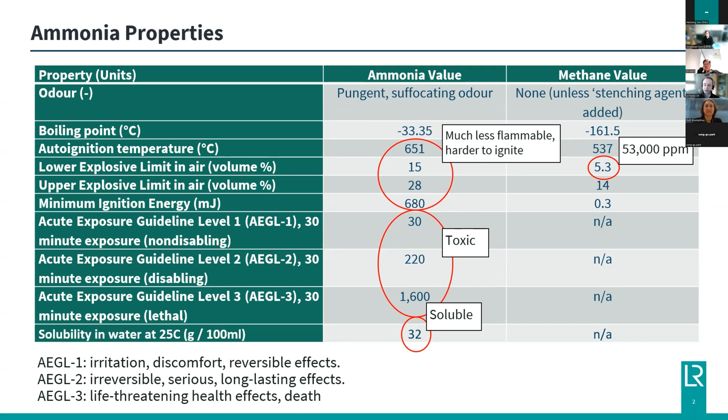We can learn a lot from what we already know about designing ships with fuels like LNG, in terms of engineering practices to design safer ships. But we need to remember ammonia is not the same as LNG - it has other properties, and the toxicity particularly means the designs we create will not always be exactly the same as for an LNG fueled ship.

Thankfully, class societies like LR and others are starting to produce rules and guidelines for the design of such vessels.

It's also important that we understand the behavior of the fuel, particularly the difference between refrigerated ammonia and pressurized ammonia. And of course, semi-refrigerated ammonia sits somewhere in between.

When we have a spill of refrigerated ammonia at its minus 33 centigrade boiling point, depending on the hole size and pressure, generally what we see is an initial release with a low fraction of vapor - most of the release as emitted is actually liquid.

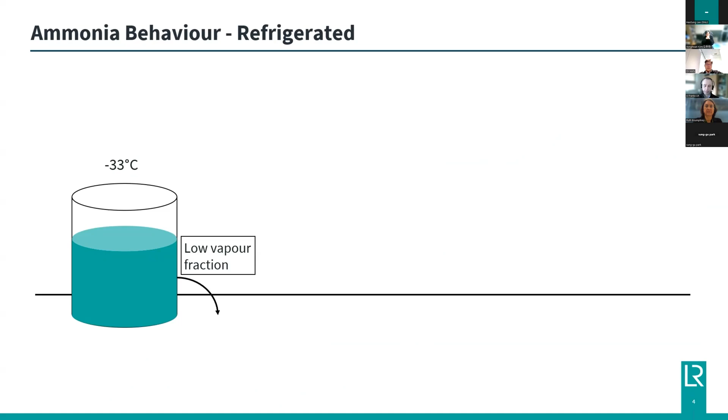As the liquid cools the surface onto which it falls, you can get a pool of liquid ammonia formed, which then vaporizes to release ammonia into the atmosphere. Because the liquid is cold, the cloud initially formed is dense, so it can stick close to a surface, such as the deck of a vessel, although later it will become less dense and start to lift off from the surface.

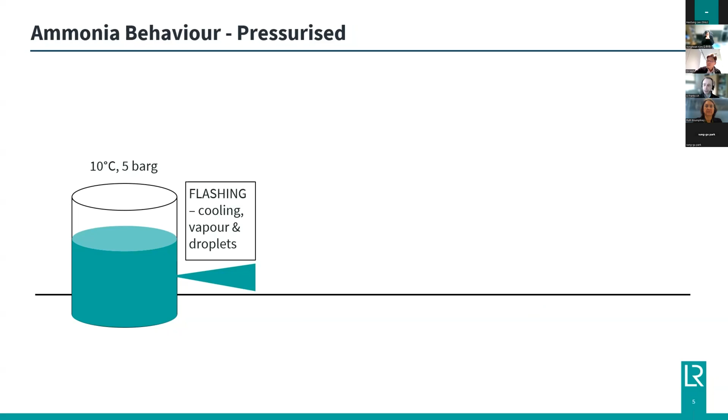If we look at a similar scenario for a pressurized release of ammonia, the flashing of the ammonia as pressure is relieved and liquid leaks into the environment produces very rapid flashing of the liquid, producing a mixture of vapor and droplets. It's possible for some of those droplets to rain out onto the surface. But as a general rule, we see less pool formation and subsequent vaporization from the pool in the case of a pressurized release compared to a refrigerated release.

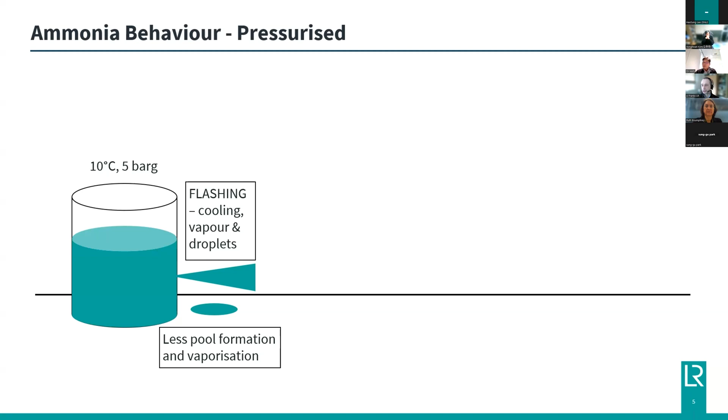And this is quite important. Again, as the liquid flashes, the vapor actually cools down to the boiling point of minus 33 degrees centigrade. So the cloud is initially dense, even though the material was initially at a higher temperature. Because we have less pool formation, the mass enters the cloud at a higher rate. In other words, the liquid is not held up in the pool in the same way as it is for liquid ammonia. So if we take a given mass release rate for refrigerated ammonia compared to pressurized ammonia, you may well see that pressurized ammonia has a longer hazard range compared to liquid ammonia for this reason.

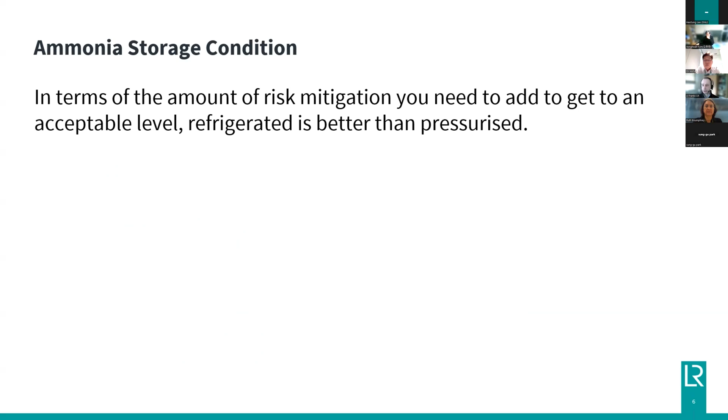So as a general principle, what we see is that the amount of risk mitigation you need to get to an acceptable level is different compared to refrigerated and pressurized systems. In the refrigerated case, you need to apply less technical safety and less risk mitigation to reach an acceptable level of risk than you do with pressurized.

Remember that the concentrations we're interested in compared to a flammable mixture are very much lower. So we may be looking to avoid concentrations of 220 ppm or even less in this space. But ventilation does not entirely mitigate that except for the very smallest leaks. So although ventilation provides some mitigation for small toxic leaks, and for flammable effects is quite effective at preventing flammable concentrations being reached, it is not always helpful in terms of the toxic effect.

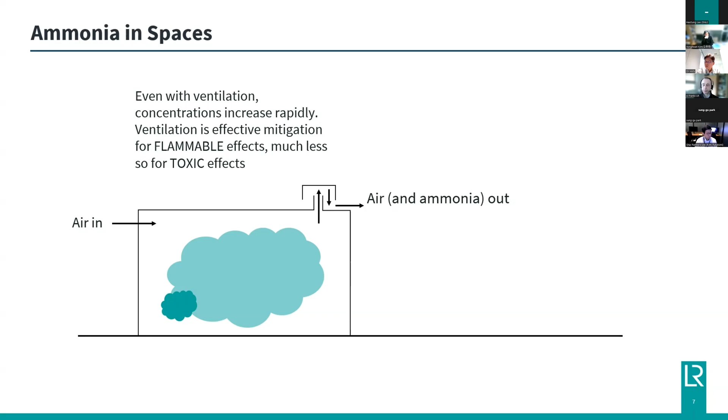We need to remember this when we're thinking about access and use of these spaces. Of course, we will look to see detection, alarm, and shutdown systems in such spaces. I think it's also important that crew access and time spent in these spaces is controlled and minimized, that intrusive maintenance of ammonia systems is carried out when the system is shut down, isolated, and purged, that the correct PPE is used, and we may well even consider automation of many of the functions inside these spaces to prevent the need for human interaction.

Another important point to remember in terms of the behavior of the cloud is how the ammonia behaves once it emerges from the enclosed space and is vented. Structures have wakes like ships, so there are turbulent regions downwind of a structure. And if the release of ammonia is too close to the top of the structure, it can get caught into this wake, even if the release is quite low density, and stay close to the deck for perhaps, depending on the concentrations and size of the release in the space, perhaps for some tens of meters.

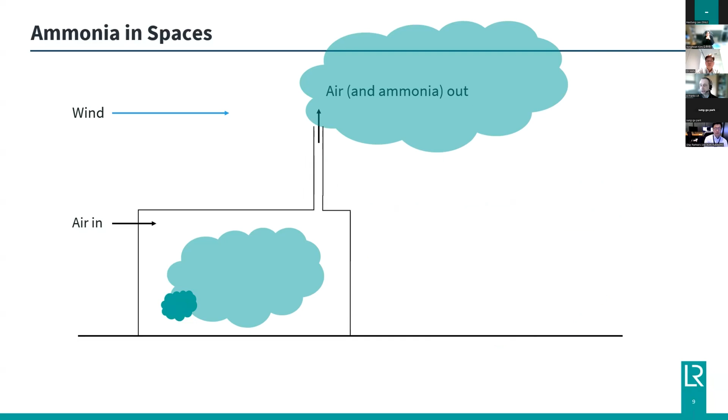So it's important to think about where you position the vents in relation to the areas that crew are expected to access. And we're now seeing this emerge as a requirement in some of the rules and guidelines that people are producing.

An issue that doesn't really come up very much when we think about LNG and other fuels is the number of leak sources that we have in any one space. And again, this is really driven by the fact that the concentrations of interest to us are quite a lot lower than they are, say, for the flammable concentrations for LNG.

So if you consider a crew member who has to enter a space to carry out a visual inspection, maybe only for a few minutes every day, the point is that once they enter the space, they are exposed to all of the potential leak sources in that space, even the ones they are not inspecting.

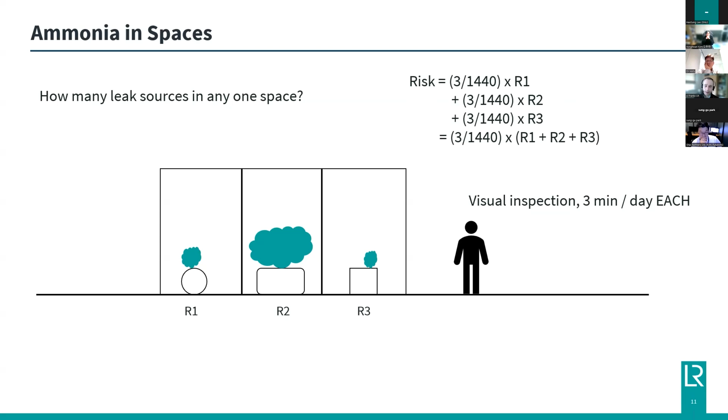And it is possible to achieve a risk reduction by dividing our spaces so that the amount of equipment in each space is less. And of course, we need to think about some of the other practical aspects of doing this. But in the work we've done on the risk analysis of ammonia vessels, when this is done properly, we can see a reduction in the risk to these personnel.

So just to conclude, ammonia is flammable, but its toxicity is a much bigger concern. Refrigerated in terms of risk and the amount of mitigation that you need is generally better than pressurized.

Ventilation of spaces is effective in preventing flammable concentrations being released, but it's much less effective for mitigating toxic effects. Exhausts close to the roof of a structure can result in the air and ammonia mixture getting pulled into the wake of the structure and down to deck level.

And a person entering a space is exposed to all of the leak sources in that space at once, and it may be beneficial to consider using 2 or 3 spaces instead. That concludes my presentation, and thank you for your attention.

Thank you, Andy. It's great, wonderful. You have very strong points, and it's persuasive. And we have only 15 minutes, but we can take 1 or 2 questions if there is any from the audience.

So if there's any question now, you can ask, unmute yourself and ask if you have. Okay, don't be shy. Otherwise, because of time, shortage of time, we have to close this presentation. Let's give a big hand to Andy. Thank you so much.

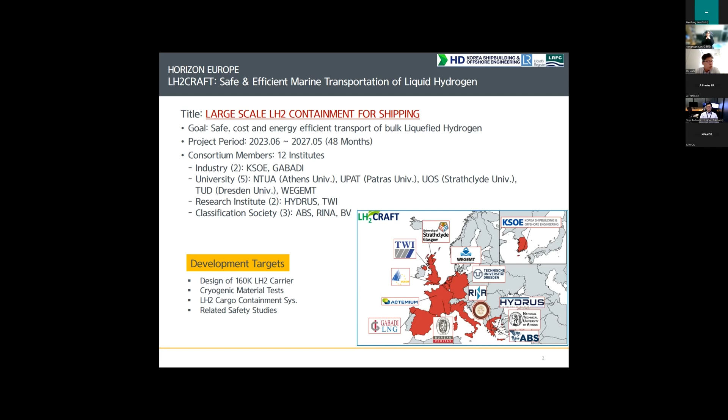So this is the project. Our project actually targets a novel sea transportation solution to LH2-based industry as one of the sincere measures to achieve the carbon neutral society. We are committed to validate our solution using an actual LH2 tank with a viable cargo containment system for liquid hydrogen. To achieve this goal, all required technology disciplines will be put together, utilizing Korea and Europe technology backgrounds.

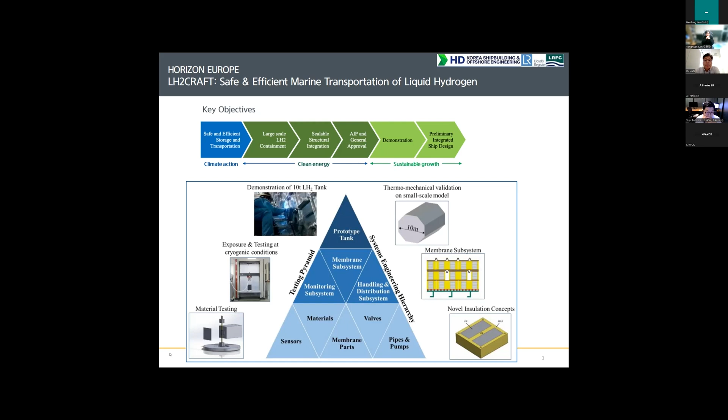So you can see from this slide, from the very basic technology, but at the end of the project, we are going to prove the technology development using an actual mobile model. Our company's role in this project is clear: we are supposed to develop the membrane type cargo containment system, but to do so, we need a certain model ship. Currently, we are targeting 160K cubic LH2 carriers, which is quite similar in size to the 174K LNG carriers.

So I think in our development, we put forward 2 important requirements as shown in this slide. One is that this cargo containment system should be able to hold cryogenic liquid hydrogen cargo. To do so, the system should have excellent insulation performance to guarantee a viable boil-off gas rate. At the same time, the system itself should show its recovering function against any failures, such as the leak of cargo. The other requirement is the design: the CCS should have robust structures.

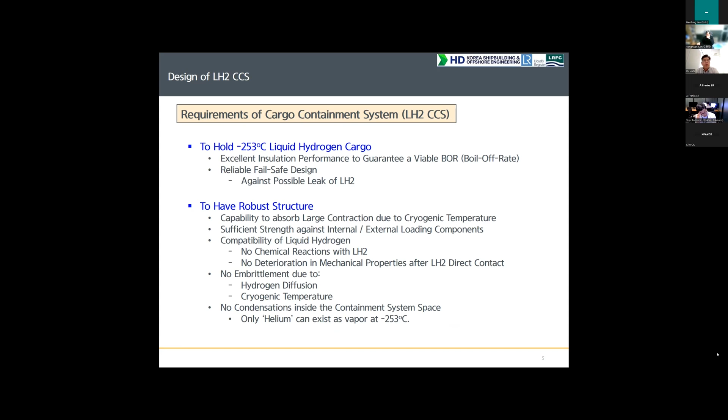Also, currently we need to make sure there is no condensation inside the containment system space. Unfortunately, only helium can exist as a vapor at these low temperatures.

So to be able to overcome these difficulties, we need a systematic approach. From this slide, I would like to touch on some basic design principles necessary to complete this challenging mission. At the moment, we do not have concrete regulation yet.

The only available reference is the IMO CCC9 interim recommendation for Type C containment systems. The thing is that we still have difficulties applying the design for membrane type containment systems for LH2 carriers.

So we are supposed to utilize load and resistance factor design in this case, but there are some basic things we can utilize from LNG CCS application. We may borrow some basic safety factors from the LNG application, but there are still other items which remain challenging. In that case, we need to resort to first principles, considering the LH2 specific issues.

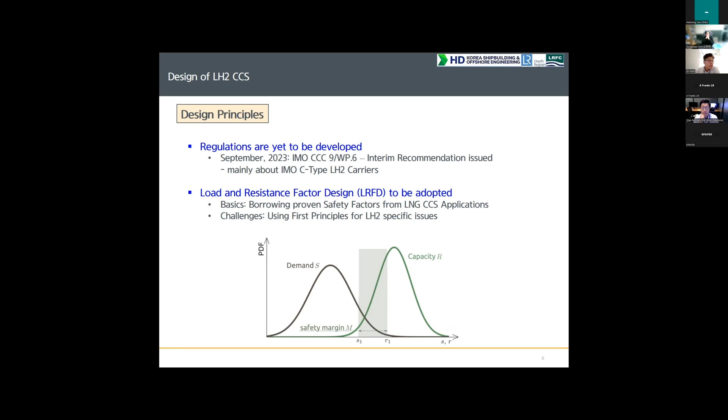So this reliability concept can be applied in this way. We define demands and capacity for every design variable. As for loading components applied to the CCS, there can be a number of important load components, such as hull girder bending, quasi-static internal pressure, and external pressure.

But thankfully those are rather easy to deal with, so we may simply utilize the LNG experience. We don't see any significant challenge from this load component.

But when it comes to sloshing impact, liquid hydrogen has its own specific characteristics compared to LNG or other materials. Liquid hydrogen has very low density. Also, it's very easy to transform from liquid to vapor, and we see that hydrogen has a large air-to-liquid density ratio compared to LNG or water.

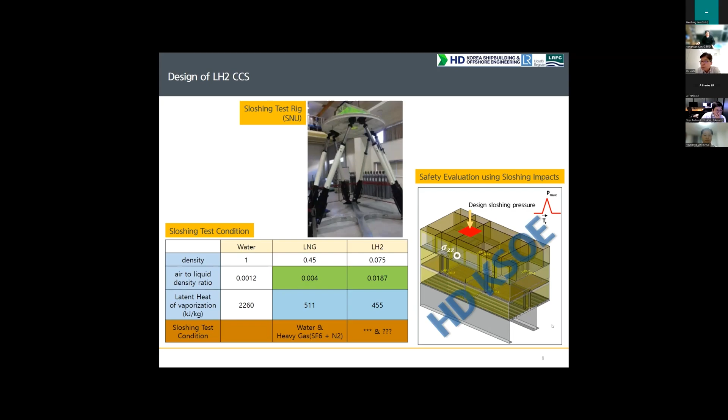Hello everyone, my name is Youngsub Lim, and today's topic is the issues of onboard carbon capture and storage. Let me introduce myself briefly. I have been working in the Department of Naval Architecture and Ocean Engineering for around 10 years, but my background is chemical engineering, especially process systems engineering. I have been researching various kinds of process systems, especially gas treatment systems, such as carbon dioxide or LNG BOG liquefaction, regasification, or hydrogen handling.

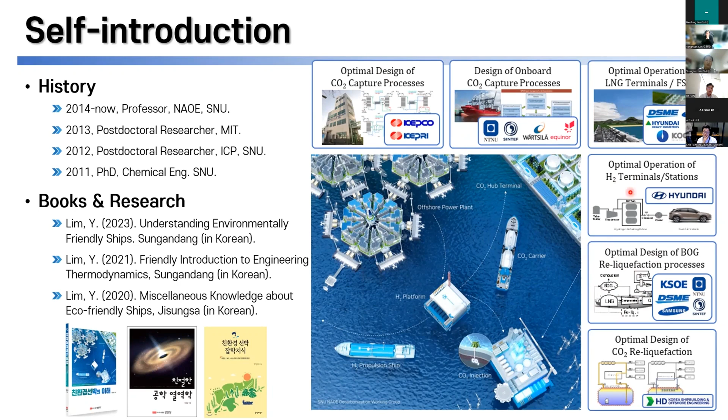This is the contents for today. I'll talk about the necessity of onboard carbon capture and introduce some major issues of onboard carbon capture and storage. Because of the lack of time, I cannot introduce all of the issues, but I'll bring some interesting things for you.

Let's start with a controversial question: onboard carbon capture and storage, is it really necessary? This is quite a hard question to answer because we all know there is no detailed regulation or law yet, so we cannot give a specific answer. But my opinion is probably yes - as a temporary solution for specific ships, we may need some onboard carbon capture and storage.

Let me explain the reason. This is an example - you already know that for economic production of hydrogen, we need to produce blue hydrogen, and for the production of blue hydrogen, carbon capture, utilization and storage is required. Because to produce green hydrogen based on renewable energy, too much money is required now. So instead, when we combine carbon capture technology with the gray hydrogen production system, we can produce hydrogen at much lower price. This is a feasible solution.

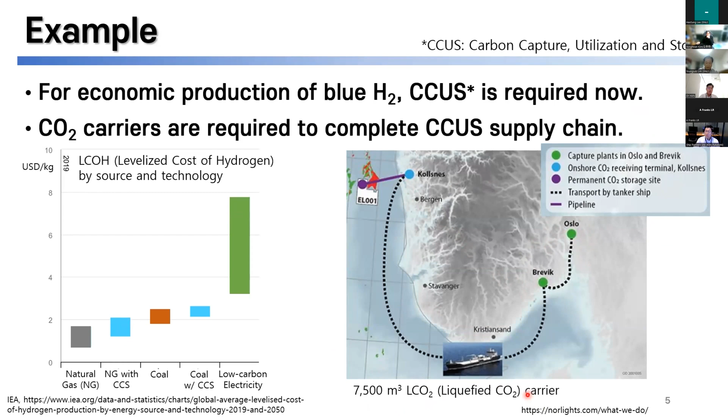Then the question is, if we want to produce blue hydrogen, and the CO2 carrier used for that production emits any greenhouse gases, then what happens? In MEPC 80, they already announced that all greenhouse gas emissions will be evaluated based on well-to-wake emissions - from production to use of the fuel, all kinds of processes could be included in the evaluation. So from the view of LCA, greenhouse gas emissions from a carbon dioxide carrier could increase the well-to-wake greenhouse gas emissions of the hydrogen fuel and even any synthetic fuels produced from that hydrogen. So in this case, onboard carbon capture could be required.

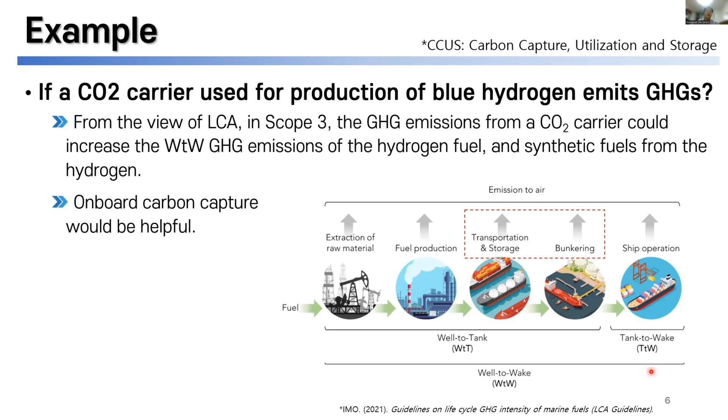So this is the reason I think this can be a temporary solution for specific ships. Now let's look at some technical issues of onboard carbon capture.

The first factor is the concentration. Carbon capture technology is quite mature, and research has been reporting that when the concentration of carbon dioxide in the exhaust gas is higher, the required energy is decreased. Typically, carbon capture systems have been applied to coal-fired power plants, where the CO2 concentration is around 15%. But unfortunately, for a ship engine such as DFD or gas injection engine, the carbon dioxide concentration is only around 3%.

So it means we need to input much more energy compared to an onshore power plant. To design our onboard carbon capture system, we should consider this low carbon dioxide concentration issue.

If we want to decrease the energy required for capture, we can combine heat recovery technology with the carbon capture system. The most commonly used carbon capture system uses amine solution, and through absorption we can capture the carbon dioxide. In this system, the most energy required is the heat for the reboiler. So if we can use waste heat from the exhaust gas, we can decrease the required energy for carbon capture. But the problem is that for a ship, the waste heat is quite limited, so how much heat we can use depends on the situation. For onboard carbon capture, we should consider this waste heat recovery system too.

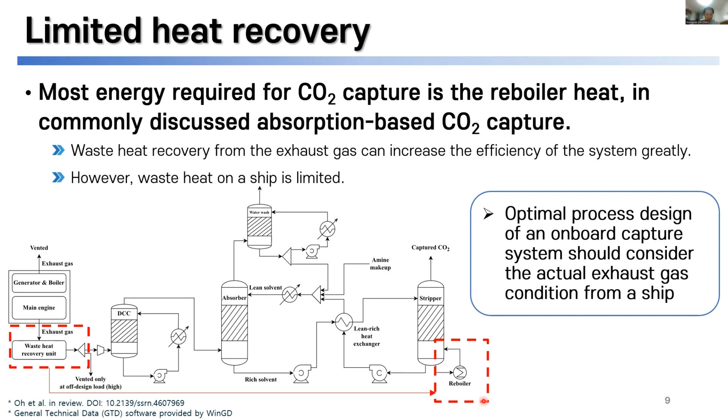The worst thing is the process conditions on a ship are always changing. This is one ongoing project I am doing with SINTEF Norway, showing one example of the engine load profile of a container ship operated by Klaveness. As we know, it has various kinds of engine load profiles.

When engine load changes, everything changes. The temperature of the exhaust gas changes, the flow rate of the exhaust gas also changes, and even the concentration of carbon dioxide in the exhaust gas changes. So it means if we want to design the onboard carbon capture system, we should consider all these varying conditions of the process system. If we do not consider it, then we cannot make the optimal process design.

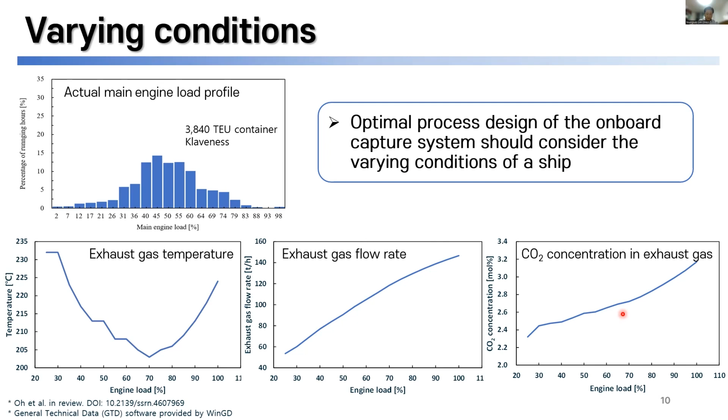There are also many issues with impurities. Here I only talk about water. As we know, water in the exhaust gas may cause icing or hydrate formation during liquefaction of the carbon dioxide, because we require -50 or -40 Celsius temperature to liquefy carbon dioxide. So it means if we want to liquefy the carbon dioxide, dehydration is inevitable. Then how much dehydration is required for the exhaust gas of the ship? That's the question.

Okay, then let's move to onboard carbon dioxide storage. In this stage, storage means not sequestration storage into geological formations, but temporary storage on a ship.

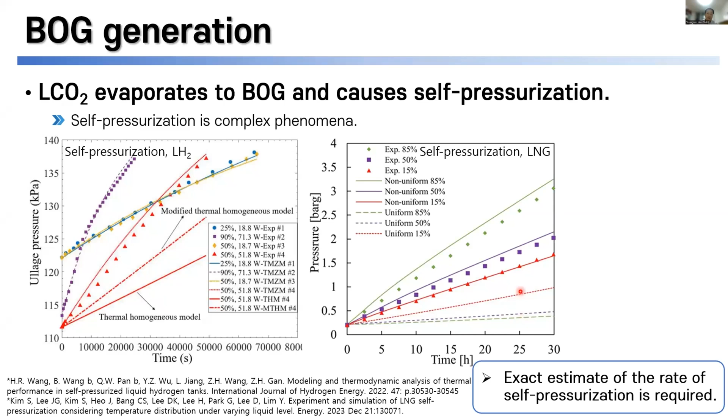The right figure is research I did with Samsung Heavy Industries, showing the self-pressurization of an LNG storage tank. Again, changing the liquid level gives different rates of self-pressurization. If we assume equilibrium conditions in the tank, it may give a very wrong estimation. So we need an exact model to estimate this pressurization speed.

Also the impurities - pure carbon dioxide relatively has lower problems, but unfortunately if we transport the carbon dioxide captured from onshore sources, it may have some light impurities such as nitrogen, hydrogen, or carbon monoxide. These light impurities may exist in much larger portion in the vapor even if we have a very small portion in the liquid. For example, if we have only 0.5% nitrogen in liquid phase, when it evaporates the concentration of nitrogen in the vapor phase can reach around 10% or even more.

And these light components may accelerate the pressure rising of the CO2 storage tank. So when there is an impurity in the carbon dioxide tank, we should be careful because the pressure rising speed can be faster than pure carbon dioxide. This means we must have a much more exact model to estimate the pressure rising speed of the carbon dioxide, considering the impurities.

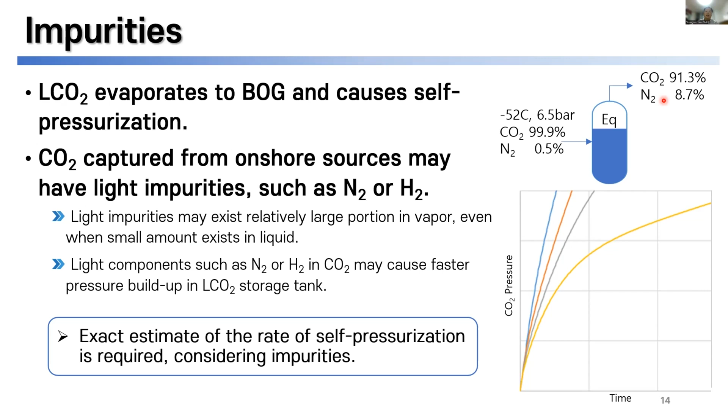One other issue is reliquefaction. As we do for our LNG carriers, we can apply the boil-off gas reliquefaction system to an LCO2 carrier also. But the problem is when light impurities exist in our liquefied carbon dioxide storage tank, because we do not consume carbon dioxide, this light gas is recycled in the reliquefaction system always - it never perishes. So this recycled light impurity gives some penalty to our reliquefaction system, and the required energy consumption of the system increases when there are impurities in the carbon dioxide content.

So, conclusion. We do not know the future, so I cannot say whether it will be required or not, but if there is a possibility, I think we need to prepare. So the onboard carbon capture and storage system - we should consider it. There are various kinds of technical issues; I only introduced some of them, but there are many other issues we have. But as a researcher, I think these are not only bad things, because it means there are a lot of things we can do for future research. I hope we can do that kind of research together in the future. Thank you everyone, I finish my presentation here.

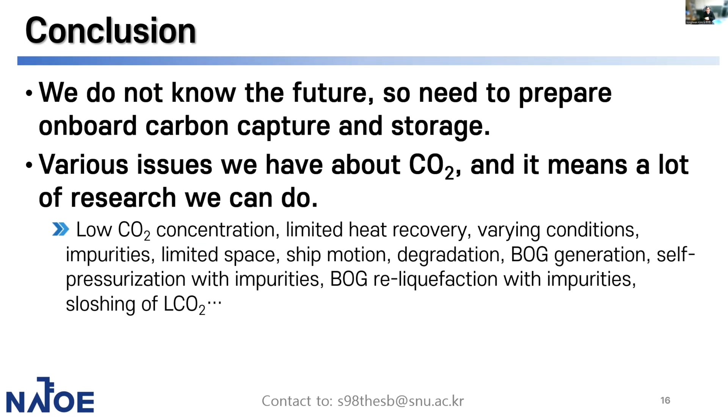Okay, thank you again. Today my topic is the safety of future ships, including autonomous ships and green ships also. So first, let me briefly introduce my university and department.

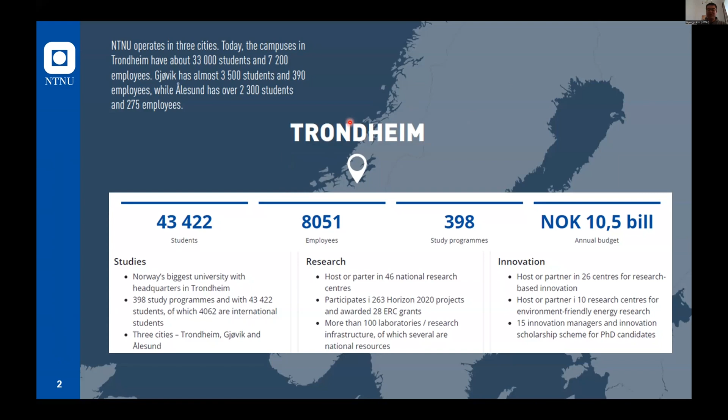I work for NTNU, the Norwegian University of Science and Technology, and my campus is located in Trondheim. We have about 43,000 students and 8,000 employees, so NTNU is the largest university in Norway. I work for the Department of Mechanical and Industrial Engineering, and in our department we have several research groups like this.

I belong to the group called RAMS - reliability, availability, maintainability, and safety. In our group we conduct various kinds of safety-related research on offshore, wind, hydrogen, and transportation, and so on.

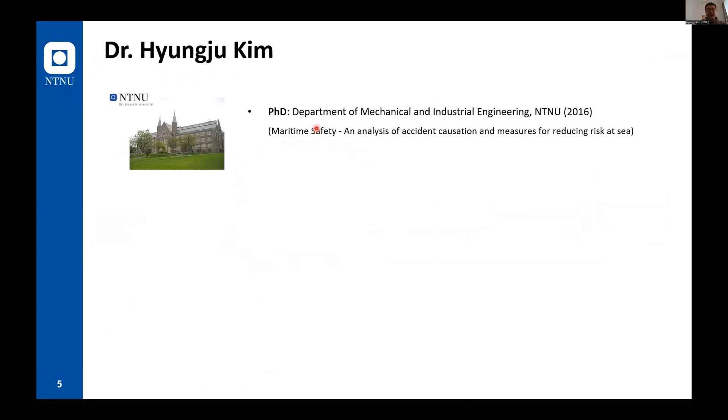I did my PhD here at NTNU on the topic of maritime safety. Before I came to Norway, I worked for Samsung Heavy Industries for about 7 years, and I did my master's and bachelor's degree in South Korea in naval architecture and ocean engineering.

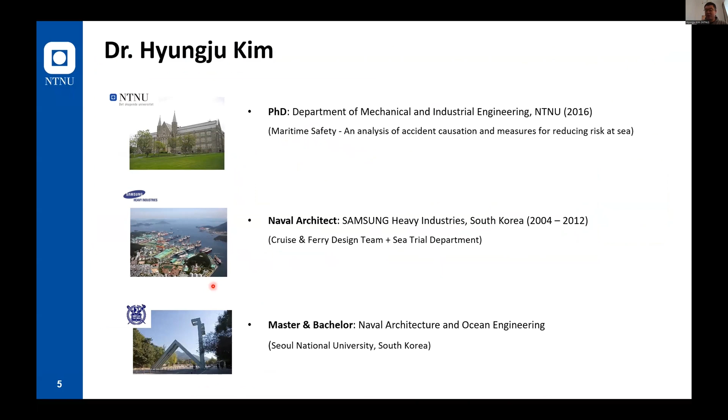I am involved, or was involved, in several research projects. Some of the relevant projects with today's topic are autonomous ship projects in Norway and South Korea, and also some green energy solution projects in Norway and South Korea.

Today I wanted to talk to you about future ship safety and two main issues: one is hazard analysis, and the other is quantitative risk analysis. So let's start from future ships and risk assessment.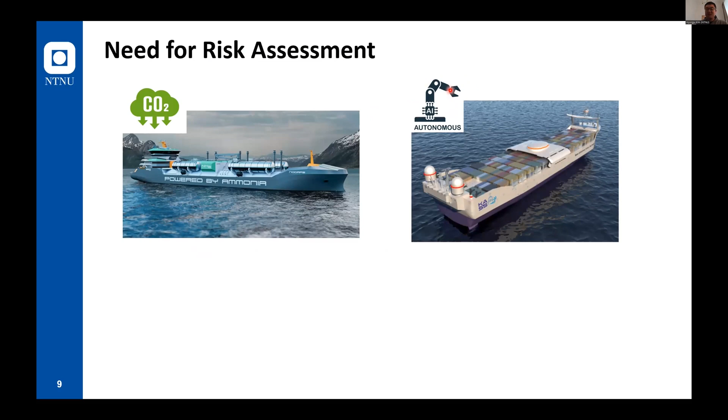As we all know, we have two main research topics in the maritime industry now: emission reduction, and autonomous operation or digitalization of vessels. So we have many projects like ammonia-powered vessels, hydrogen-fueled ships, or battery-powered ships, and also many projects utilizing digital technology for ships. In both cases, we don't have any descriptive requirements for those new future vessels, and most guidelines or standards require conducting some risk assessment for them. IMO provides some guidelines on how we can conduct those risk assessments.

Normally in the maritime industry we use some traditional, very well-known and widely used risk analysis methods for ships. These methods are famous and widely used, but there are some challenges and limitations. So the objective of today is to address some challenges of this traditional risk assessment method and suggest some possible solutions for them.

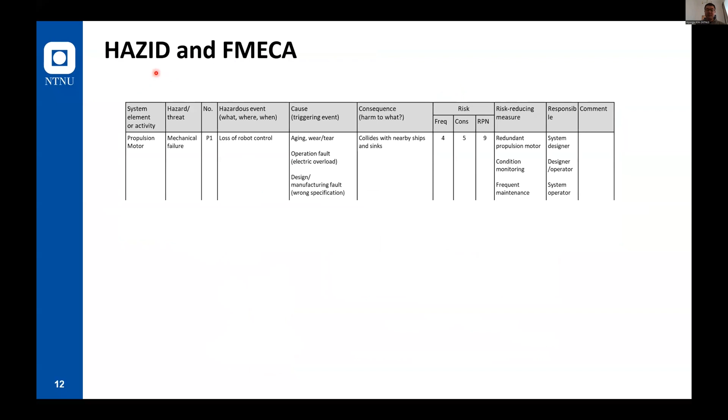So we can start from hazard identification first. For this, we use methods called HAZID or FMECA or FMEA. HAZID and FMEA look like this: we do some brainstorming, and based on this brainstorming, we identify possible hazards or hazardous events, their causes and consequences, and so on.

This is a very widely used method in the maritime industry, but there are some challenges and limitations, because this method is based on brainstorming. So the quality of the result is highly dependent on who analyzed the system.

And second, especially for FMEA, we analyze component failure, a single component failure. But in the real world, we may have multiple failures at the same time, or one failure that can affect various kinds of problems, or even an accident without any component failure because of the complex configuration of the system.

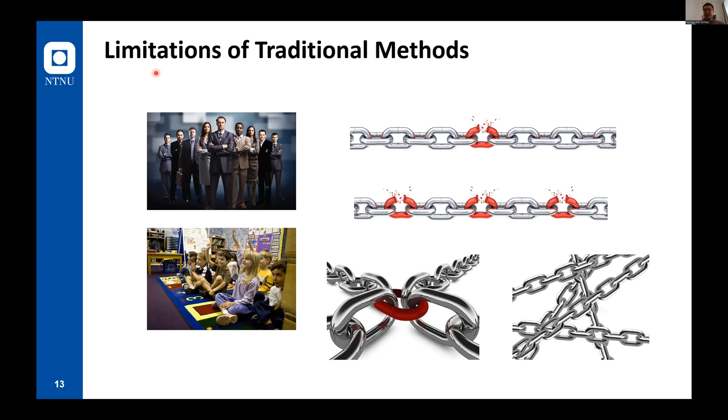So there are many arguments that using those traditional methods for future ships may not be enough to identify every kind of possible hazardous scenario. So maybe we can adopt some new and advanced hazard analysis method, and one of them can be a method called STPA.

STPA is System Theoretic Process Analysis. This is a hazard analysis method based on STAMP theory. The main focus of this theory is that accidents are not caused by failures, but most modern accidents are caused by very complex control actions.

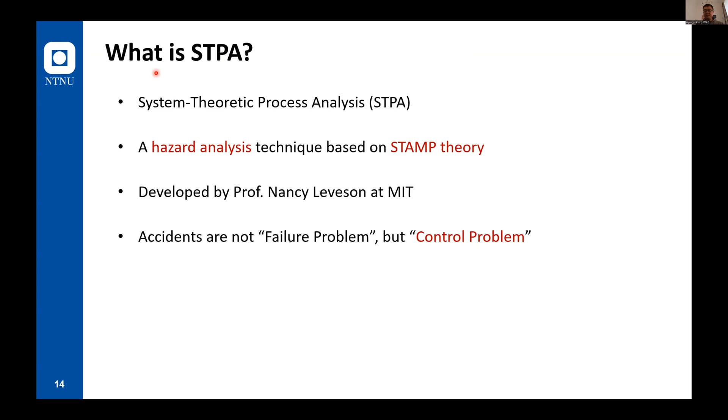So the main objective of this method is to analyze unsafe control actions, meaning control actions that can lead to an accident, and to identify loss scenarios. Loss scenarios mean the reason why we have those unsafe control actions.

And this method is widely used in various sectors and domains, especially for aviation, aerospace, or nuclear power plants, but not in the maritime industry yet.

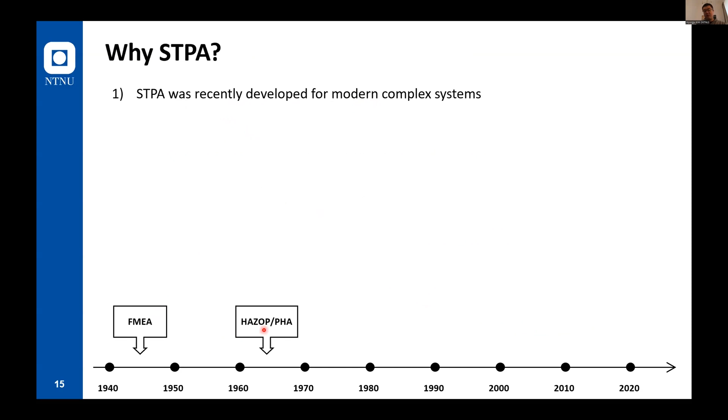Then you may ask why we need this new method, since we already have traditional methods like HAZID or FMEA. The reason is that this method was recently developed for modern complex systems. FMEA was developed in the 1940s, and HAZOP and PHA, one of the HAZID methods, was developed in the 1960s.

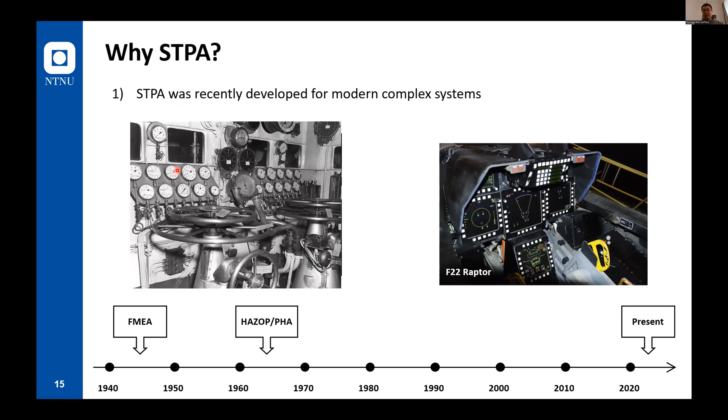This is why FMEA focuses on component failure, because all that control was conducted by a physical system. But now we have much more critical issues other than component failures in these complex systems. STPA was developed to analyze this kind of modern, complex, software-intensive system.

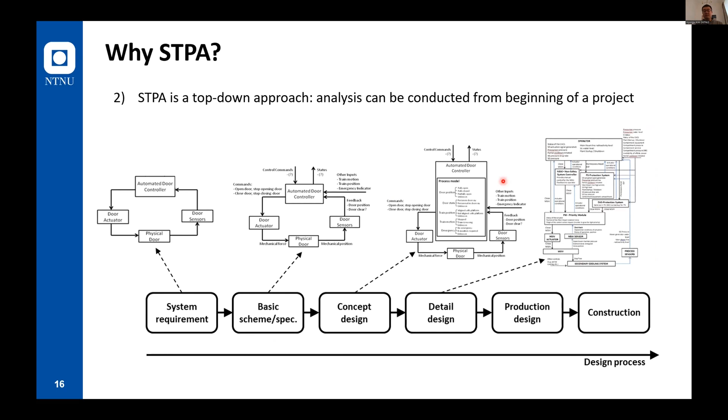This method is based on systems theory, so it adopts a kind of top-down approach. So we can use this method from the very beginning of a project or design, unlike FMEA, because in FMEA we analyze components, so we need a certain amount of design completed. We cannot use FMEA from the very beginning of the project, but we can use STPA from the beginning phase.

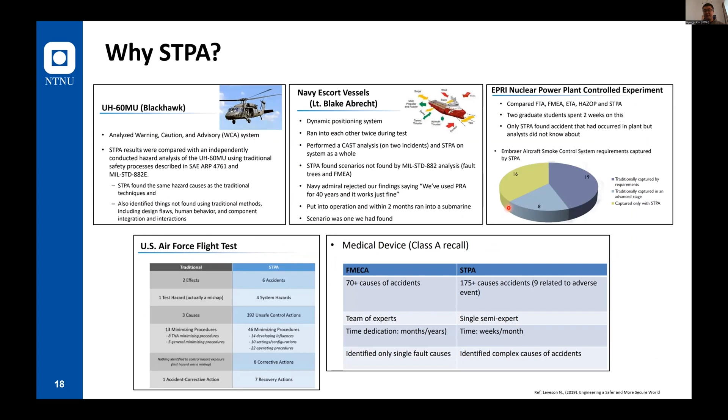STPA can also provide a wider scope than other methods, including component failures, human errors, software errors, and dangerous interactions, and so on. There are many studies supporting that STPA could identify more problems than other methods. This method is being adopted as an industry standard, especially in aviation and the automotive industry, for self-driving cars, for instance.

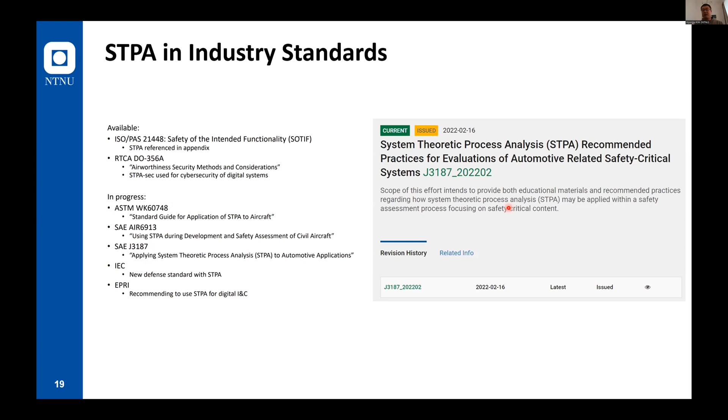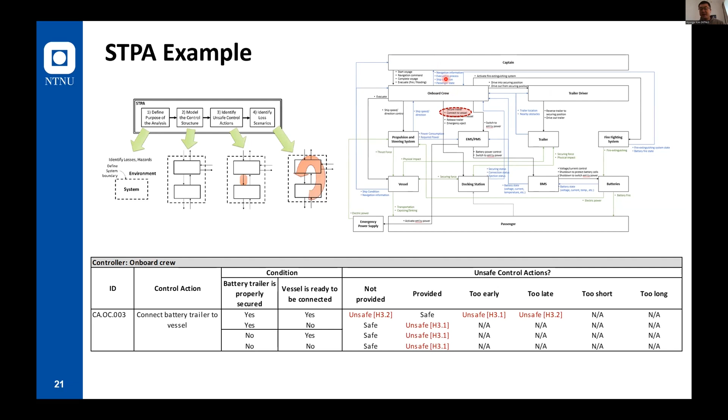I have applied this method to various applications like subsea systems, autonomous ships, battery ferries, or automated port operations. This is an example. Unlike HAZID or FMECA, we don't rely on brainstorming, but analyze the system first. We identify what kind of controllers we have in our system, what control commands they have, and what feedback they will receive. We examine those control commands one by one, so we can more systematically identify hazards from the system.

The advantage of this method is quite opposite to the limitations of traditional methods, because it provides a very well-structured and detailed procedure. So the quality of the result is not so dependent on who analyzed the system. In addition, this method can analyze not only single component failures, but also multiple failures or complex interactions of the system without any failure. So this can be one possible candidate method we can use for future ship safety.

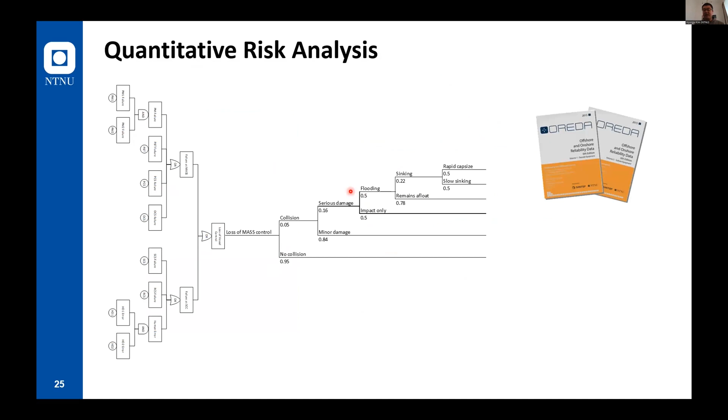And the next point is about the quantitative risk analysis. For this, we normally use a method called the fault tree analysis and the event tree analysis, and we use some historical failure data. Then we can calculate some numbers.

It is an average risk per year or risk per month or something like that. And this average risk is, of course, constant against time because it is an average. And we design the system so that our average risk is below the acceptable risk.

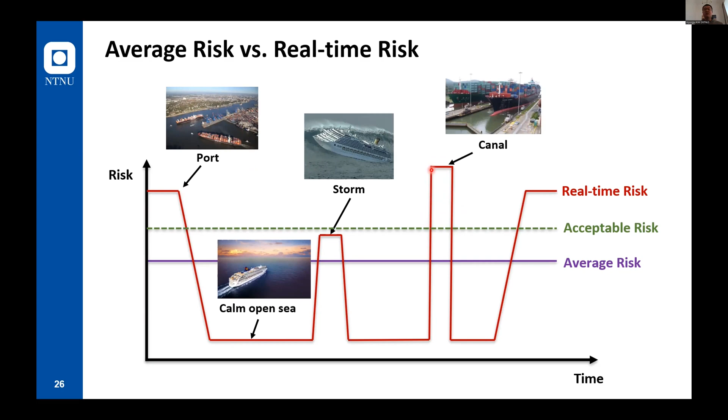But the risk in the real world is not average, right? The risk varies a lot depending on the operating conditions. For instance, at the port, in heavy weather, or at a canal, we may have a higher risk than the vessel in calm and open sea. And sometimes those real-time risks can exceed the acceptable levels. So it's very important to analyze not only the average, but also the real-time risks of the vessel.

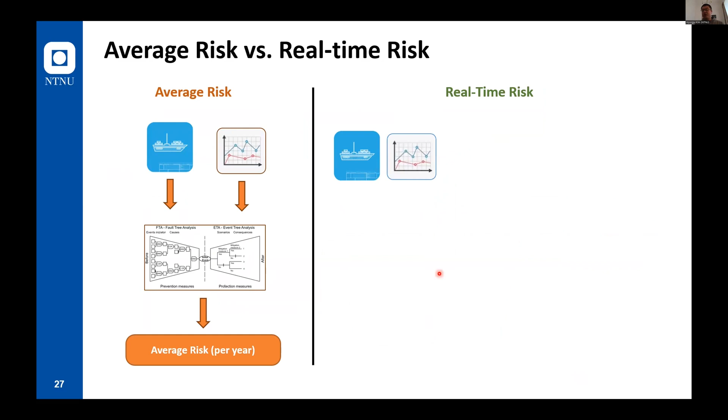So in the average risk analysis, we use the system configuration and some historical failure data, then we calculate average risk. But in the real-time risk, in addition to those, we use some real-time sensor data from the system, like temperature or vibrations, weather conditions, and nearby vessels' location and speed and so on, plus maintenance logs and even human factors. We consider all those factors and we calculate the risk at this moment.

And I'm currently working on this real-time risk analysis for the KASS project in South Korea. So we use both fuzzy logic and the Bayesian network, so we can express the level of risk in our vessel at a specific moment.

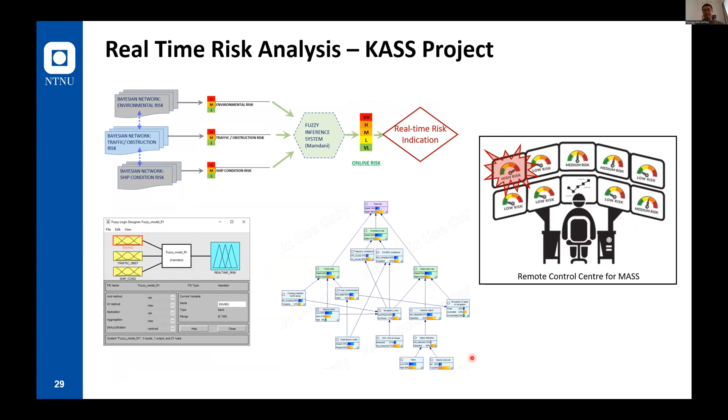So to summarize, we will have many new technologies for decarbonization and autonomous operation of vessels. And always, when we have new technologies, we have new risks. So we need some risk assessment for those new technologies. But some traditional methods may have challenges. So STPA, real-time risk, or other new approaches can be a solution to analyze the safety of future ships.

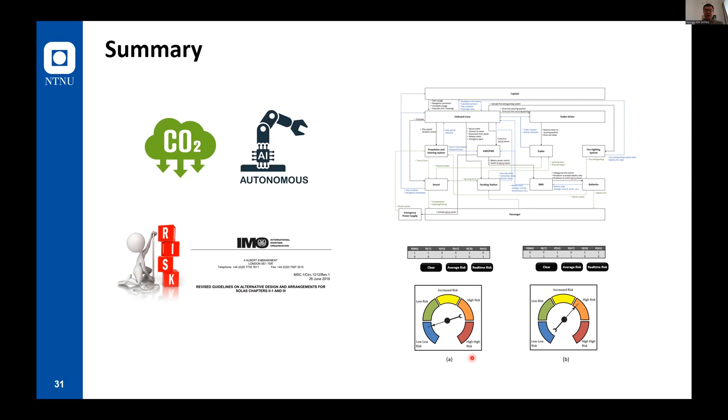So lastly, I wanted to say that when I presented this to companies or industries, they normally ask me whether it is required by regulations. Is STPA or real-time risk required by regulations? Then the answer is not yet. Then they are not interested anymore in this.

But I wanted to say that we will have totally different hazards in the future because of this autonomous operation of vessels. And we will have much more critical and severe consequences in an accident because we will use ammonia or hydrogen for the fuel of vessels. So we also need, I think, some new safety approach that can ensure a safer ocean, because we don't use FMEA for self-driving cars, and we don't rely only on average risk in the process industry that handles hydrogen, ammonia, or other dangerous chemicals.

So even though they are not required by regulations, for a safer world and safer ocean, I think we also need to adopt some new and advanced safety analysis methods.

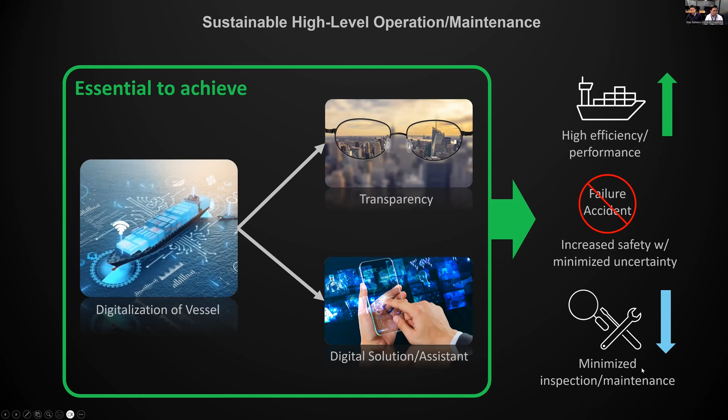Let me show more detail regarding the transparency. Transparency means monitoring the vessel's status clearly. Currently it's easy to see the navigation status, engine and equipment status, and cargo and carbon footprint.

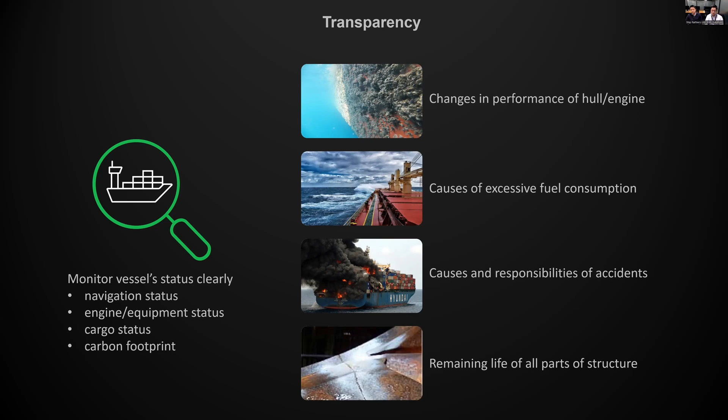However, the owner and operator want to know changes in performance of hull and engine due to hull fouling, and causes of excessive fuel consumption due to wave or wind, and causes and responsibilities of accidents. We may need some camera system or sensing system to explore the causes and responsibility, and we want to know the remaining life of all parts of the structures.

We want to increase the efficiency and safety of the vessels. For this, we may need solutions for efficient and safe voyage, effective dry docking and maintenance guidance, and effective inspection or maintenance timing or methods, which leads to minimized downtime and managed failures.

Then we can consider the digital twin in two parts. One is the structural digital twin. It includes monitoring of hull stress on entire parts, not only where strain gauges are installed, and it also provides prediction of the fatigue life, updated by physical visual inspection and maintenance, and also provides the allowable loading condition with the route.

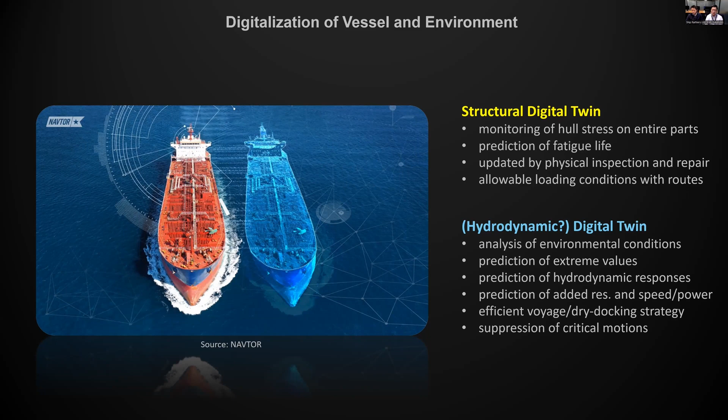The digital twin is simply defined as the digital representation of a vessel, which is updated in real time. We have added two requirements. First, full integration into a monolithic architecture, because the vessel is partially digitalized by the sensors, so we think it is not powerful otherwise.

The other requirement is two-way synchronization. It means the digital twin can control the physical vessel, and then the digital twin can receive the response and data. By these two requirements, we can apply many digital solutions seamlessly to the real ship. This is why the digital twin is important for developing digital techniques for real ship operation.

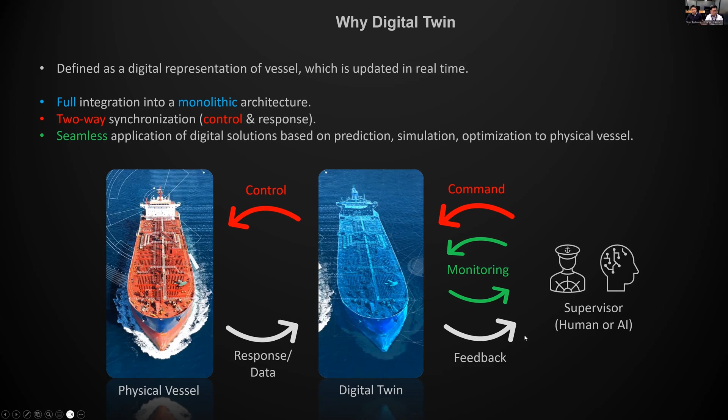Let's see the figures at the bottom of the slide. The supervisor could be a human, or will be replaced by artificial intelligence in the future, and the supervisor only interacts with the digital twin. We can command something for optimal action, and then the digital twin will control, and the physical vessel will respond to the digital twin, and we can get feedback from it. This makes it very easy to optimize ship operation and maintenance.

The structural digital twin will provide locations vulnerable to corrosion and cracks, and then the robot can perform visual inspection and measurement, UT measurement of thickness, and then report the evaluation of structural safety. It will provide a checklist of repairs to the supervisor.

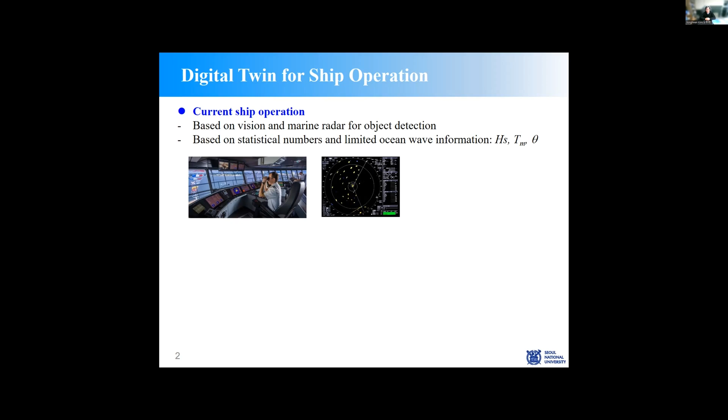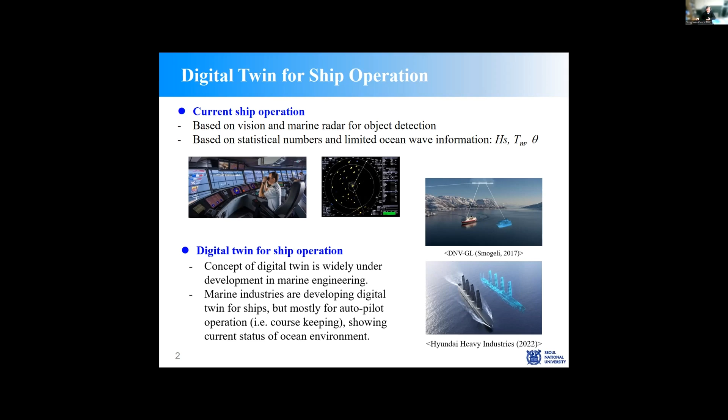That's the reality. To be a real digital twin, we need to move on and we need much more advanced technology. Currently the concept of digital twin is widely under development, but my concern is rather than real time, it's based on current technology integration. That's okay in some systems - we can define the computer domain to mimic the physics, but if we can do it in real time, that will be very useful. For instance, if you can predict ship motion and waves and any risk in actual seaways, that will be wonderful in real time.

If you see this near future, that's what we call the Prophetic system. If we can do it, the ship operator can operate the ship using such data and information, simulating the scenarios in advance - seeing the future. To do that, we need some elements.

So we need to predict the ocean waves. That's the most difficult part. We are not talking about significant wave height, mean period, and wave heading only - we are talking about the real evolution of the free surface profiles. So we have to reconstruct the ocean wave profile and also predict the ocean profile. And also we need to predict ship performance and safety in waves, like operation efficiency, seakeeping, maneuverability, dynamic stability, structural safety, and collision avoidance, etc.

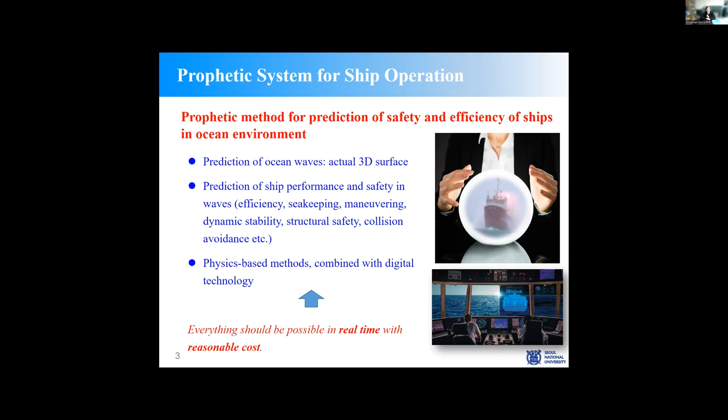My understanding is we need this kind of thing based on physics. It means we need to combine physics and digital techniques. Digital techniques alone have a definite limitation. But again, this should be done in real time with a reasonable cost. That's the basic concept.

If you see the autonomous function of nowadays cars, it's based only on vision, LiDAR and visual sensors. And the navigation system is only based on the current traffic situation, just getting the information of the current situation and trying to find the optimum route.

If we can predict the future, what will happen? For instance, if you set a target in an active navigator, and the navigator can say, okay, 2 minutes later you will face an ambulance in front of you passing with high speed, why don't you speed up, or why don't you slow down to avoid it?

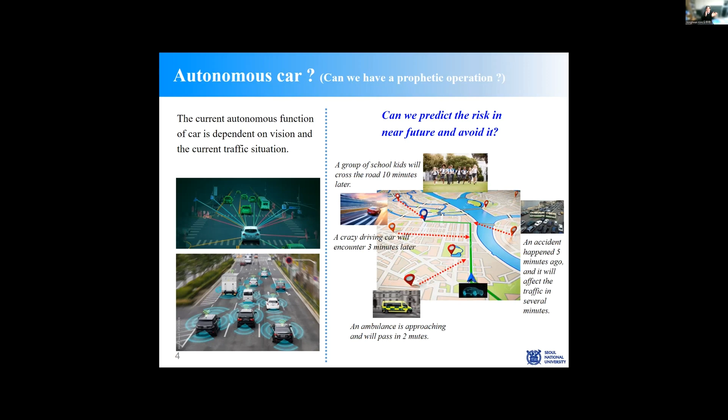The other case is, say, we have school closing time 10 minutes later in such a location. Why don't you speed up, or why don't you detour to avoid some risk? If we can make such things, what will happen in the ocean?

Basically the same. We can avoid excessive roll, you can avoid parametric roll, you can predict the efficiency, we can find another way to get there. So many things will be possible.

Recently we developed some elements which are essential for this kind of system. The most difficult part is from the ocean waves, because technically it's difficult to predict ocean waves. Again, it's a full profile, not just the 3-hour significant wave height.

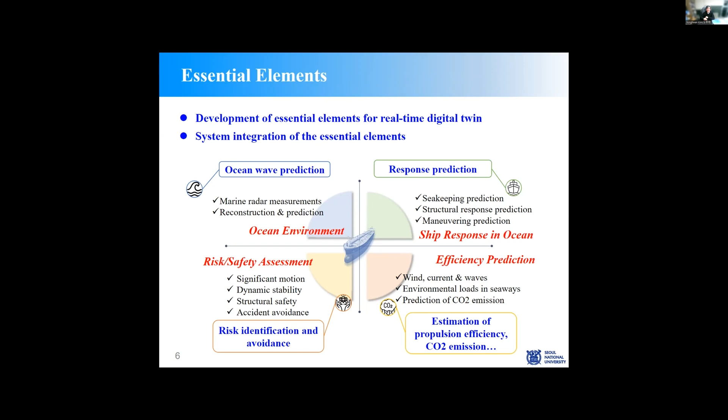If it is possible, we can get the responses like seakeeping or structural responses or maneuverability. Also we can predict the efficiency in wind, current and waves, and predict the ship operation propulsion efficiency, and we can identify the risk and avoid it.

Recently, we worked with MIT to develop the wave module. Currently, X-band radar is being used to detect wave statistics, meaning again the significant wave height and mean period.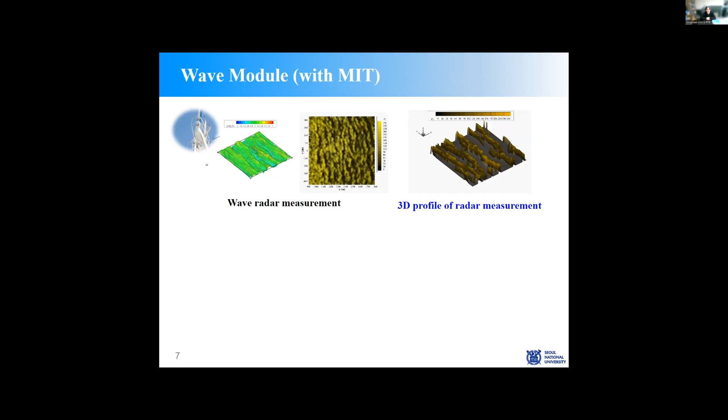But if we use X-band radar, normally it comes through the image, and images are very spiky signals. So there are very thorough mathematical formulations and systematic approaches for how to reconstruct the waves. This is the most difficult part again.

If we have such reconstruction, we can forecast the wave conditions in the near future, and based on that we can get the responses of ships with different characteristics. This is one example we recently developed.

I would like to show two examples. One is Ieodo data fixed on the bottom, so it's stationary. The other one is from the ship. They use the X-band wave radar, analyze the wave, and we are comparing the significant wave height.

Again, we are not only doing the significant wave height. We can define the free surface evolution, but we don't have such exact data, so we just compare the significant wave height. If you see the fixed, bottom-fixed case, the correspondence with the existing X-band wave radar is quite acceptable.

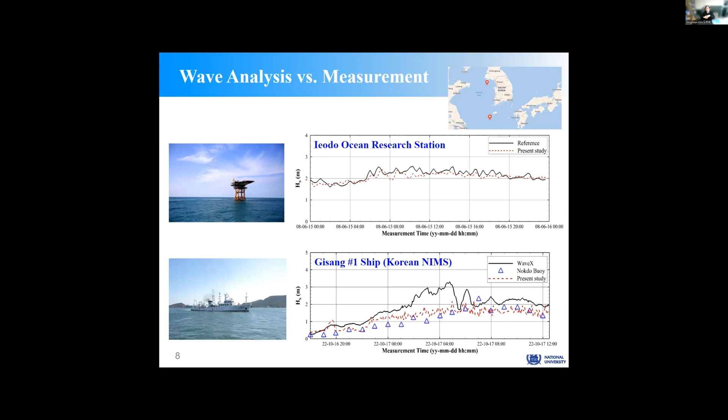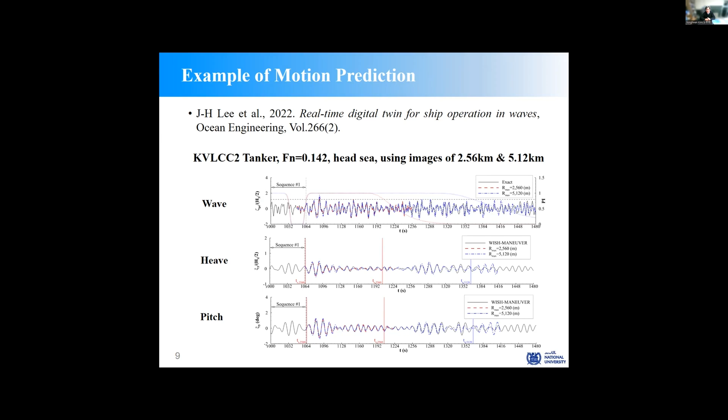Anyhow, this is an example. Another example is, if we can predict such waves 10, 20 or 30 minutes ahead, we can predict the ship motion like heave and pitch, whatever, 6 degrees of freedom. I didn't include it here, but we can change the trajectories. We can find the risk. And this can be done in a sequential way.

What I mean is we measure with the X-band radar for 1 or 2 minutes, then you can predict like 10 or 30 minutes ahead, and we can continue. Theoretically, this we can do all the time. Okay, that's actually the basic idea.

So we made a pilot platform for Daewoo Shipbuilding and Marine Engineering. This was done 1.5 years ago. We delivered the code, named twin ship, and it includes reconstruction of the wave, prediction of the wave, prediction of the motion, and prediction of risk.

So in the case of head sea, we are facing the wave. The prediction time depends on the expanded radar range, but with a normal range, you can predict like 10 or 15 minutes ahead.

But following sea, we have a much longer, more than 30 minute interval. So we can do this kind of things, and we can define the optimum course to minimize the risk. So if there is a pilot platform, it's working in real time.

But there are some future issues that should be overcome to utilize this more efficiently. We lack validation because there is no system like this, so we have to identify the accuracy and check the validation. The other issue is wave radar - I have doubts that current wave radar doesn't have good accuracy to measure the wave profile.

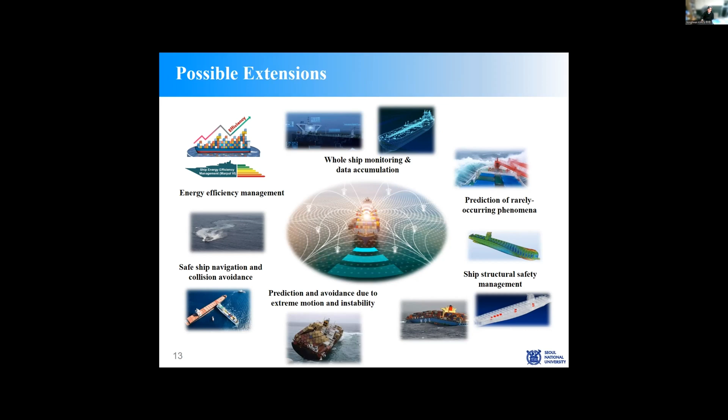So application and integration is very promising. This project was funded by DSME and also the Korean government. I appreciate it, and thank you for your attention. Okay, and this is the end.

Okay, my topic is safety regulation for decarbonization and digitalization. I would like to share what is the current progress and current status of new rule development for decarbonization and digitalization.

As I already explained, I would like to share the current progress of LR rule guidance notes for decarbonization and digitalization.

Firstly, the decarbonization issue. As you know very well, IMO has a clear greenhouse gas emission reduction target by 2050, net zero. The 2023 IMO greenhouse gas strategy adopted at MEPC 80 targets net zero greenhouse gas emission from international shipping by around 2050. We have indicative checkpoints to reach this net zero greenhouse gas emission - for example, at least 20% reduction, striving for 30% by 2030, and 70% reduction, striving for 80% by 2040, compared with 2008.

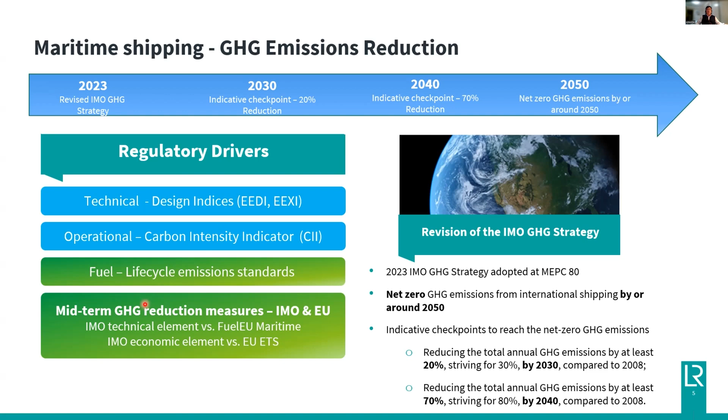As you know, these are the regulatory drivers. From a technical point of view we have design indices EEXI and EEDI. From an operational point of view we have the Carbon Intensity Indicator, CII. From a fuel point of view, life cycle emission standards, and also mid-term greenhouse gas reduction measures - for example, Fuel EU Maritime and EU ETS and so on.

This IMO regulatory landscape was prepared by CCC 9, based on last year's CCC 9. Currently we have no mandatory instrument issued by IMO. However, we have interim guidelines for various alternative fuels, for example methanol and ethanol.

The interim guidance was issued in 2020, and then fuel cell power installation guidance in 2022. However, the ammonia fuel interim guidance to be issued by IMO is expected at the end of 2024 this year. And hydrogen fuel is also expected to be approved by CCC during CCC 10.

These are the summary of LR rule and guidance notes for various alternative fuels. For example, requirements for ships using methanol as fuel we already issued in July 2021. Requirements for ships using ammonia as fuel, January 2023, and the hydrogen case, March 2023, like this.

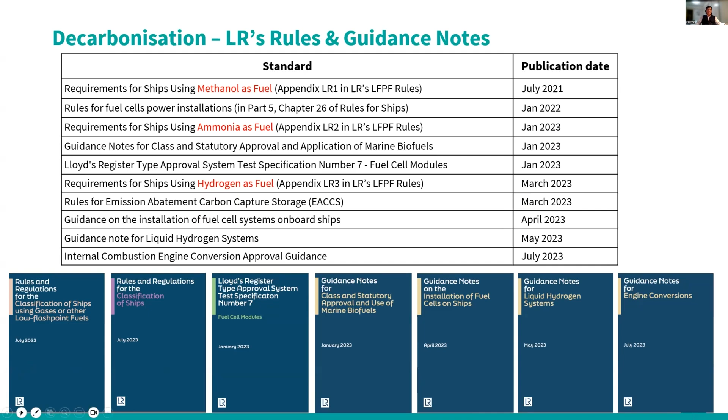Let me explain the methanol fuel in more detail. For gas carriers under the IGC base, there's no development up to date from IMO and LR. However, for non-gas carriers under the IGF base, interim guidance by IMO was already issued in December 2020. Based on this, the LR rule requirement was also issued in October 2021, effective from 1 January 2022.

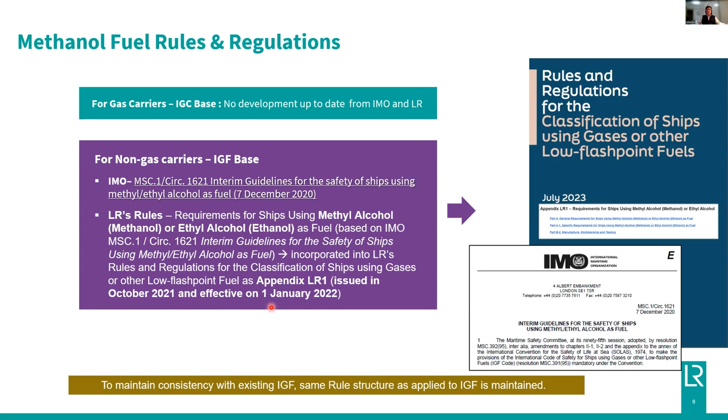Then ammonia fuel rule and regulation. As you know very well, under the IGC base, the use of cargo identified as a toxic product shall not be permitted. However, it needs to be amended in the next MSC 109. LR rule development work is on the way for ammonia fuel application to gas carriers by July this year.

Then hydrogen fuel rule and regulation. For the IGC base cargo, interim recommendations for carriage of liquid hydrogen in bulk were issued in 2016, but it needs to be updated. For fuel, no development up to date from IMO and LR. But for non-gas carriers under the IGF base, IMO interim guidance will be expected by the end of this year, 2024. LR rule we already issued in March 2023, effective from 1 July 2023.

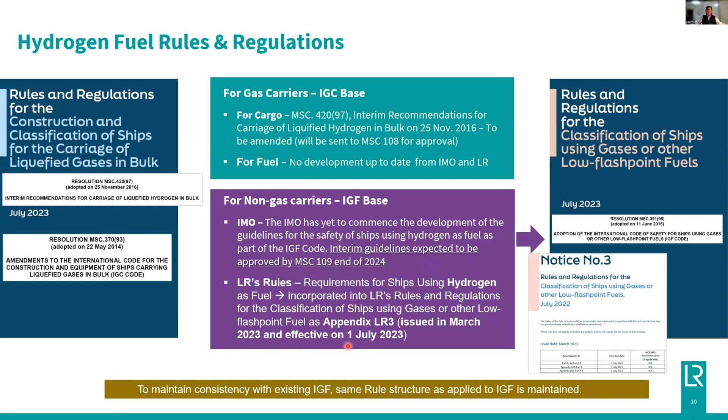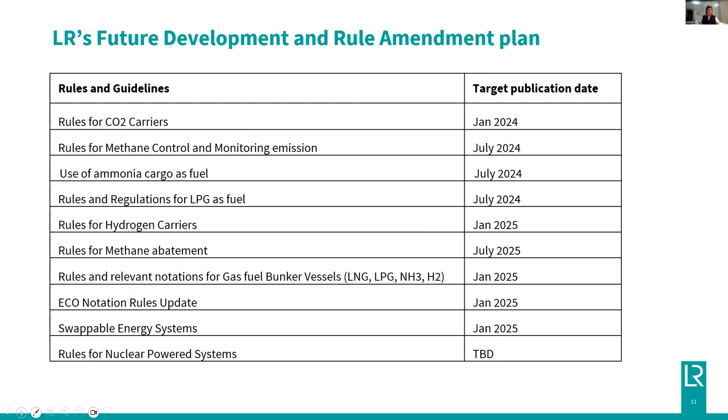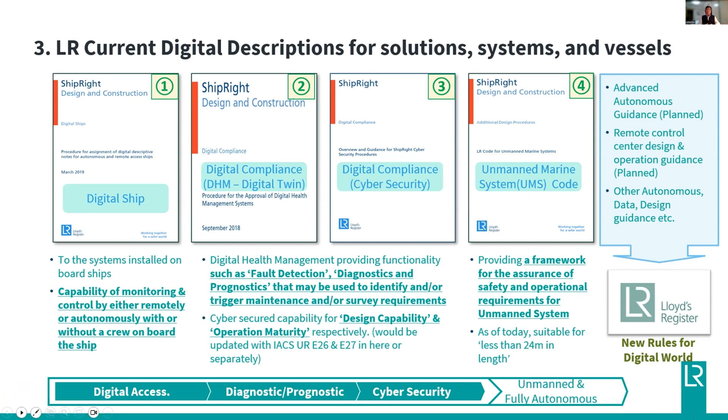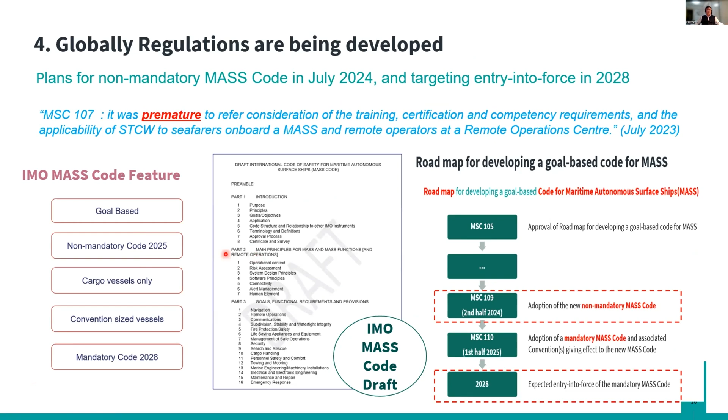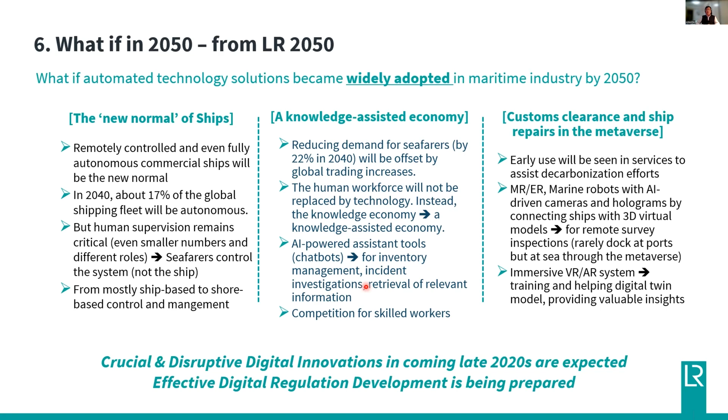Okay, thank you. That is all for now. Any questions?

Sorry, a little late. No, it's not late at all. Yeah, okay, thank you so much.